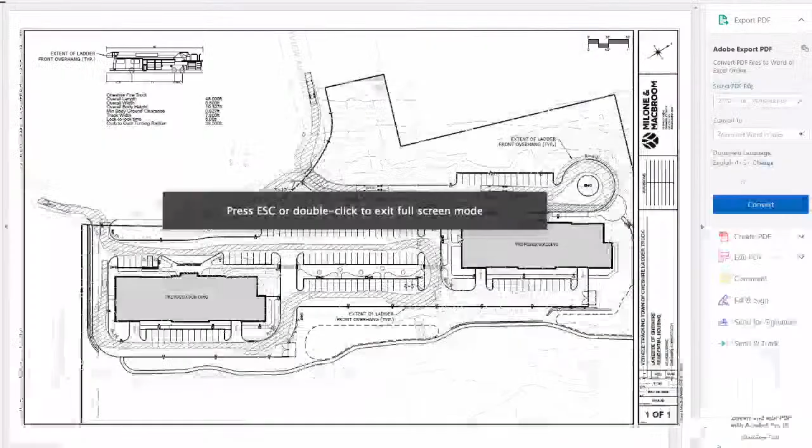Number 8, a key box system approved by the fire department will need to be installed on each building with access, keys provided for all portions of the building.

Number 9, all parking will need to be designated parking spaces with no parking allowed in the roadways internal to the development. Appropriate signage will be required. Number 10, all stair towers and the separation between the underground garage shall be rated construction.

On July 22nd, 2020, the planning office received a call regarding the numbers that were stated at the last meeting having to do with the petitions, and there are corrections. The petition to stop the zone change had 152 signatures, 33 of them were out of town, and 3 had no addresses at all. The petition to remove the Hazel Drive special permit application hearing from the agenda until there's in-person meetings had 165 signatures, with 31 of those being out of town. So those corrected numbers should be reflected in the minutes.

Additionally, the afternoon of July 24th, 2020, we received additional signatures, 23 signatures, 12 of which are out of town, in the petition to stop the zone change.

Okay, now for the comments. At 7:25 p.m. tonight, checked the dedicated public comment line, and there are no voicemail messages that were left between the last meeting and tonight at 7:20.

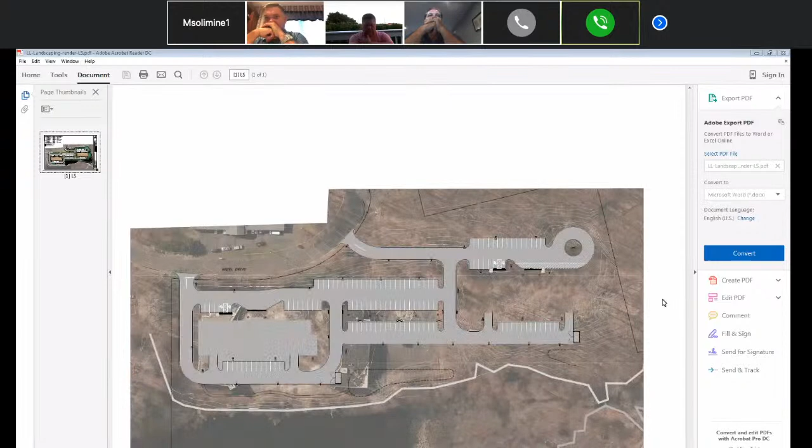My employment involves substantial daily travel with little extra time to be aware of local matters. As a result of this and other personal matters, I am late in becoming actively aware and involved in the matter at hand and regret that I have insufficient time to present more evidentiary material. Nevertheless, I offer the following.

My husband and I have been residents of 45 Lakeview Avenue since the purchase of our home on December 11th, 1980. Over the years, we have invested in improvements to our home and property, as well as maintenance and improvements to Larson Pond Dam, which were ordered by the State of Connecticut DEP Water Resources Unit. We were approached by the state within months of our home purchase after the previous owners of 50 Hazel Drive rejected responsibility for any such dam and spillway improvements. We eventually had this work performed with the required engineering studies, planning, permits, work, and inspections, all at significant personal cost. We have continued responsibilities and costs such as periodic professional inspections and assessments assigned to us on this matter.

My husband and I have enjoyed, cared for, and improved our home on Lakeview Avenue. This house was built in the early 30s, and we are only the second owners of this property. We have no plans to leave this home and the property anytime in the foreseeable future.

I want to present my opposition in, A, the July 13, 2020 meeting. Public access was made only available through virtual live streaming on YouTube due to COVID-19 restrictions. I believe it's important and more effective that this hearing be held in person to publicly discuss these issues with the Planning and Zoning Commission members. I support a delay of the July 13th scheduled hearing until such time that this meeting can be held in person, publicly attended with open participation. Further, that no vote on this should occur until after the public hearing. Other town meetings and hearings are being held as normal.

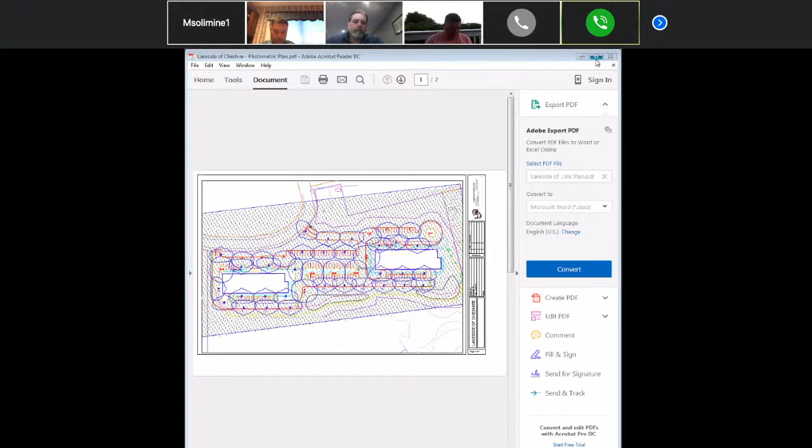It's disturbing to see such little regard for our pond and neighborhood shown not only by the company building on this site, but also by members of our own town who fail to ask critical questions about the effect such a project can have on the ecosystem. As someone raised here within the last 2 decades, I hold a point of view that not many others share. I can attest to the unsafe nature of traffic on Waterbury Road. There was some discussion about school buses during the hearing, but I think it's important to hear the expertise of residents of the area, especially children. I spent every day from kindergarten to 10th grade waiting at the end of Lakeview Avenue to catch my bus. The number of potential accidents involving children that I've witnessed are countless.

Watching cars breeze past the school bus while it was stopped with lights flashing and the stop sign fully extended was a weekly, if not daily, occurrence. I have no doubt that the woman who drove my elementary school bus all 6 years that I attended Doolittle Elementary School will confirm this fact. She spent a ridiculous amount of time blaring her horn at drivers who spent increasing amounts of time staring at their phone instead of the road. I began learning to drive when I was 16 years old, and from that point on, I no longer took the school bus. Instead, I began to brave the left turn out of Lakeview Avenue myself during morning rush hour.

I know 4 other students in the Lakeview, Andrew Larson area alone that will be driving within the next 2 years. This includes my sister, and I am terrified of the idea of her having to learn how to take a left-hand turn out of Lakeview Avenue as it is, let alone with 114 apartment units built just down the street. For someone to visit our neighborhood even multiple times during the COVID-19 pandemic does not give a true estimate of the traffic in the area, nor does it outweigh the years of experience of actual residents in the area.

I understand it's impossible to satisfy everyone all the time. I merely ask that you choose to consider the consequences this project will have on lifelong residents of your town. I ask that you make a decision with the families, children, and wildlife of the area in mind, rather than the cherry-picked statistics of business people seeking to make money at the expense of Cheshire citizens, your neighbors, friends, and the people who look to you right now to make a choice in their best interest. Respectfully, Emma Fox.

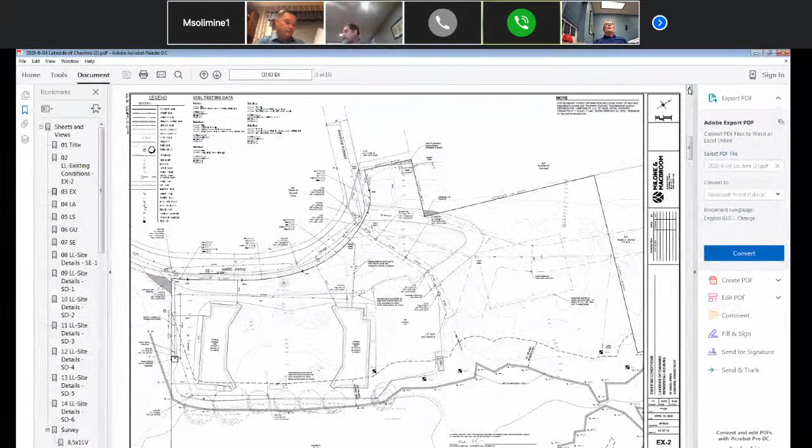The insertion of a large concrete environment seriously disturbs the current environment. In addition to the potential for creating a pandemic hotspot, the insertion will immediately create a heat sink, counteracting the cooling effect of the foliage it will displace. There is proposed landscaping, but not enough to offset the negative effects of the parking lot and building structure.

There were comments relative to children, but again, this is relative to the dangers presented by significant traffic on less than adequate roads and the requirement for children to wait for a school bus on a busy major road and the lack of suitable sidewalks. We are concerned for the safety of our children, our neighbors' children, and the children of the potential occupants of the development. There were comments about the potential impact of an increase in the children attending schools, but it appears to me that such comments were spurred by the reference to decreased school enrollment within the documents submitted by the applicant. I will note that there is a degree of skepticism regarding the current process.

However, when one considers a public statement, including that developments generate approximately 6 trips per day for a total of 900 trips, and then state that the proposed Hazel Drive development will generate a considerably less number of trips, 50, one can understand the level of concern.

Consider the IWWC committee minutes indicating that the standard calculation that generates an estimate of 23,448 gallons per day for development at 50 Hazel Drive was changed to a calculation that generated an estimate of 12,005 gallons per day. Apparently, there was a discussion between a representative of the applicant and a representative of the town, and they decided that a change should be made because the units would be smaller. Perhaps the commission, applicant, and citizens can work together to improve this application along the lines I suggest.

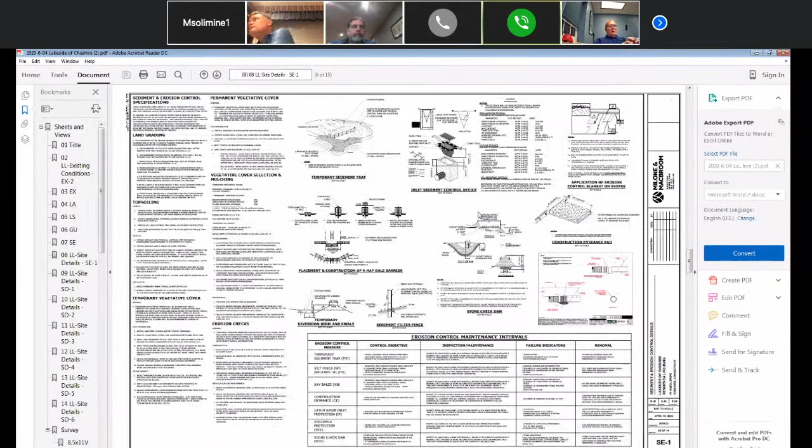Question: Why wasn't the text of the reports from the police and fire department put into the last meeting minutes? Why doesn't the applicant have to start with the state traffic and DOT level first for approval? This seems to be going backwards. When the applicant did their traffic study, were all three street traffic coming in and out calculated all together, or did they have numbers for each street individually?

The traffic study engineer said that the visibility study was taken from the emergency breakdown lane, not the stop line. When pulling out of the road, if a vehicle gets hit at which line they are, then who is at fault?

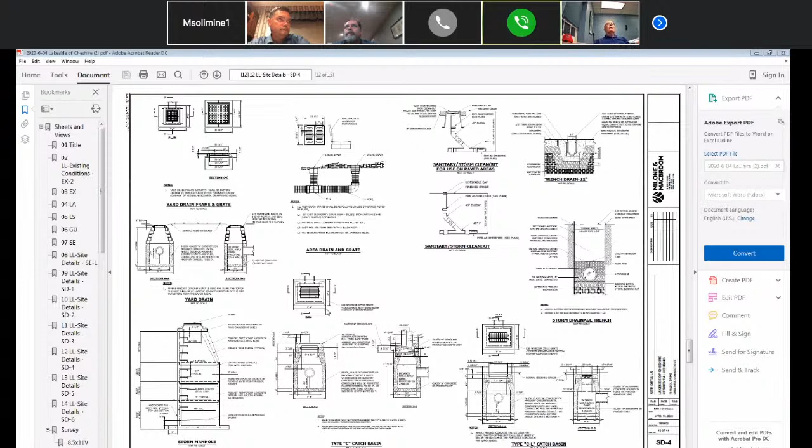Did the traffic study take into consideration that the emergency lane is used daily to continue the 2 lanes up to the light? If the law requires 228 parking spaces and there is no visitor parking included, it was passed through inland wetlands with much less. Then why is zoning even taking this application into consideration until it is sent back to inland wetlands with the mandated numbers?

If this project is passed, in the water runoff, how will it be protected? Will there be a cleaning and servicing program attached to this forever? How often will it be cleaned and serviced, or not at all?

If the residents find a significant loss in property values, will the town then lower our tax base? What on completion is the annual tax of this project? Are there tax exemptions? What is the average sized Cheshire home tax?

Do either cover 2 children per school system? Is there a plan to make a safe bus stop for those children that are now existing and the massive overload from the amount of children from the 114 units?

If we can only save 1 child. This is an agenda. Safety is a huge problem. Please think of the future. Do not let this project burden your soul. Thank you for the job that you all do. I admit I could not do it. May God bless you all. Respectfully, Stanley Emon Jr.

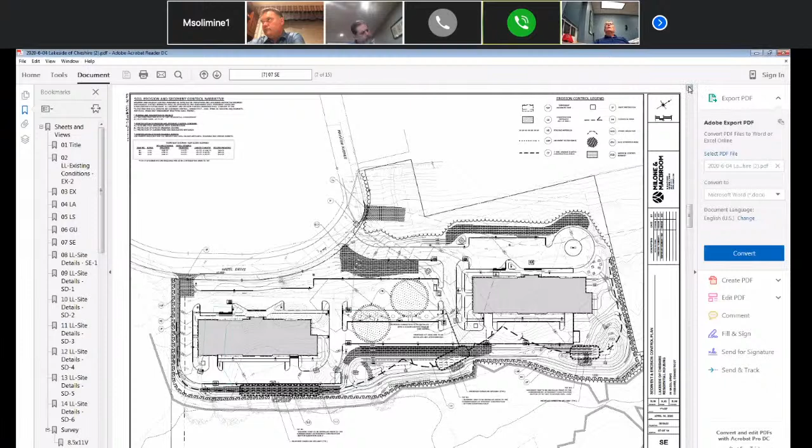Comments received today, July 27th. Dear Planning and Zoning, we would like to give you a list of reasons why the Hazel Drive building project must be stopped. This should be addressed when public meetings are open again, not shoved through during a pandemic when residents cannot attend real meetings with our voices to be heard.

Number 4, dangerous for children and all pedestrians on Hazel Drive and Route 70 Waterbury Road. 5, school and town services are limited, especially because of COVID-19 restrictions. Route 70 is dangerous for school buses already. Number 6, nature and wildlife disruptive. We have swans, herons, egrets, owls, wild turkeys, turtles, multiple varieties of birds, foxes, coyote, bobcats, deer, bears, and moose.

This area is mostly Cheshire City water property. Number 7, property value will decrease and we all lose privacy. Number 8, this is a small residential neighborhood. This huge project is out of place for this area. It's a huge project that should go on the 691 area that is already zoned multi-purpose.

Number 9, Waterbury Road is very busy and dangerous. Adding 200 plus cars will be a nightmare. They will use our streets to exit and enter, which will remove peace and safety from the current residents. Number 10, the pond is dangerous for children and was struck by lightning many times, even recently. Number 11, this will disturb our peace as the pond carries sound on both sides.

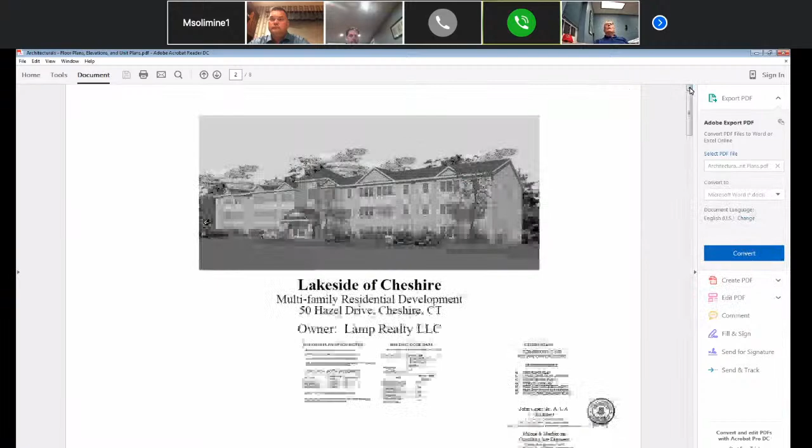I hear well-founded concern about children's safety and sidewalks. Waterbury Road will need speed bumps, but the exception of children in the building does not explain the 1.5 person occupancy in the studio apartments. As a former single parent, promoting single parent households is an irrational choice.

Proposing overpriced, undersized apartment living offering little more than inconvenient access to Interstate 84 exit 26 is also an irrational choice. The residents not killed by COVID-19 and traffic accidents will still have to get past the bears. Anyone with marketable skills will be looking for more, for their housing dollars to go elsewhere.

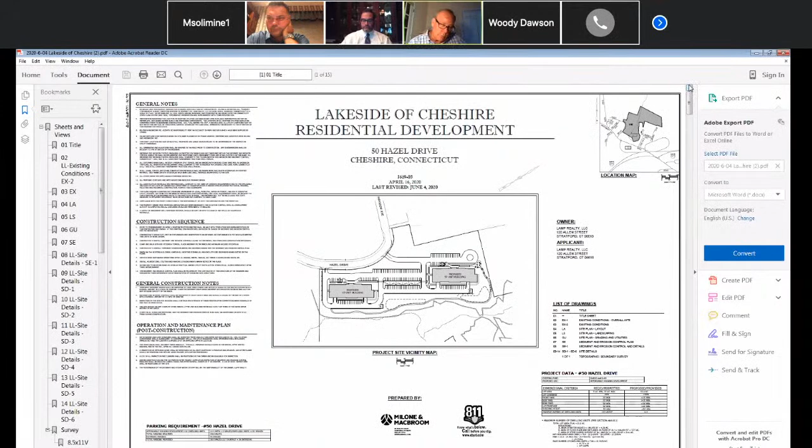And they're looking at a vehicle coming, assuming we're looking to the left, coming westbound, and that driver is X amount of feet away depending on the speed, with their height of eye sitting in the car at 3.5 feet. That's the mechanics of how we measure it and determine what's available and what is safe.

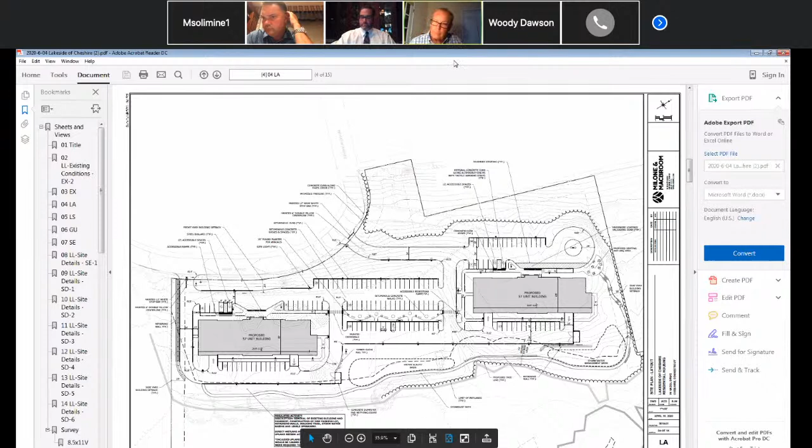There's one more issue I'll quickly touch on, though my colleague Ryan will talk more specifically about it: pedestrian accommodations. There is a sidewalk there on the west side of the road. Ryan and I talked a number of times and collaborated to get a nice connection, so there's a connection from the site to the roadway with a crosswalk system that gets you safely across the street to the sidewalk system, which would get you to Waterbury Road.

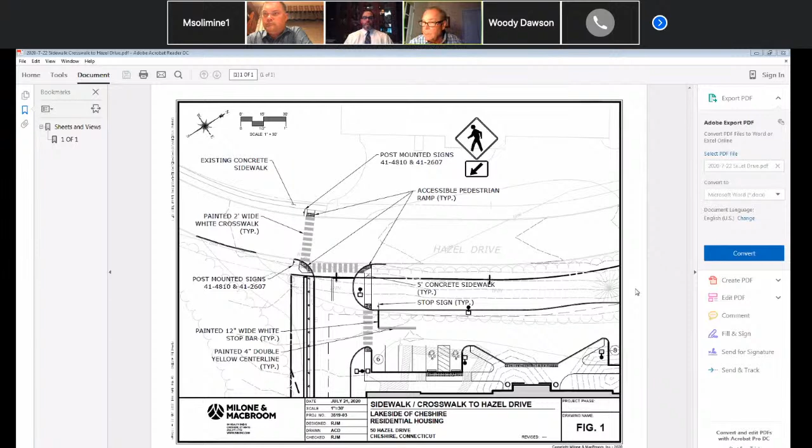So that's my summary, and I'd be happy to drill down on anything the commission would like, but I tried to keep it without being too repetitive. So thank you.

I do have one question. You mentioned you can bring some of the issues to DOT when you go to speak with them. I tend to agree with the sidewalk on the west side of Hazel Drive where it ends and doesn't get close to Waterbury Road. Is that something we can make sure you bring up with DOT? Maybe they bring it up anyway, but that's something I'd like to see DOT look at in detail, specifically making the sidewalk extend out to Waterbury Road.

I don't know how school buses work either, the number of school kids in the area, it might get school buses down that road. I don't know how that works, but if not, just looking at where the sidewalk stops, I believe someone said it was about 170, 190 feet where there is no sidewalk going into Waterbury Road.

Again, there is sidewalk on the west side. It's really about maybe 15 feet short of getting out to, I'll call it, Waterbury Road proper, but it does go all the way out there. It's not hundreds of feet away. It's difficult to see because a lot of it is covered with brush and debris, so that needs to be daylighted. But to answer your question, we could certainly address it with DOT.

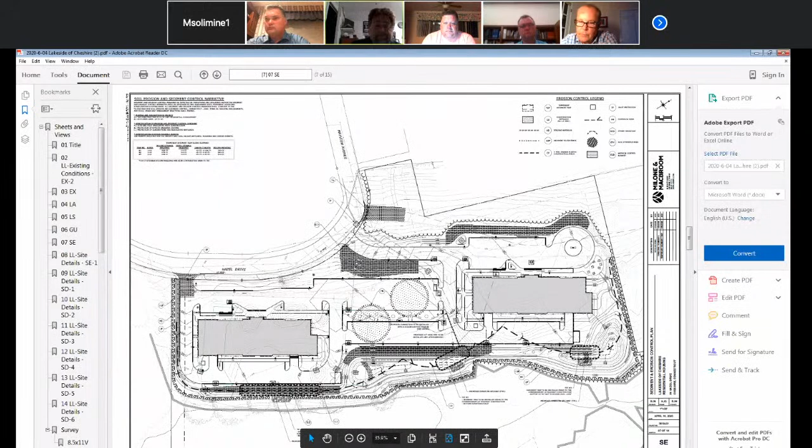If I could just make one more point, and Ryan did touch on it, but if you believe our statistics, which I tend to because they're ours, there'll be some 40 extra spaces there. So it's not like we're coming up with our estimate based on these three sources and saying we expect the demand to be 180 and we're doing 183. We're expecting the demand to be somewhere below 150, probably between 140 and 150. So we're going to have, in our opinion, a reserve of probably 30 to 40 parking spaces at the 183 number.

Have I ever been wrong in 30 years? Absolutely. So if I am, Ryan has identified where that additional parking would go.

Well, like I said, I can't get past the additional parking because a lot of people are staying home and family members are joining them and all that stuff. I really think the additional parking is a necessity from the beginning. And that's my opinion.

Respectfully, if I could just jump in, with regard to the parking spaces, I just want to be clear here that I'm looking at numbers on the parking demand and their statistics. We have three different organizations giving us statistics about the parking. ITE is saying 149 parking spaces is statistically what they estimate. ULI is saying statistically they estimate 130 spaces based on what this is. And MMI, which is the regional analysis you put together, is estimating 143 spaces here. The reason I'm asking, I just want to make sure those are correct, because I'm hearing a lot of anecdote and I'm seeing data, and those two aren't adding up. At least in my opinion, I'm going to go with the data over the anecdote.

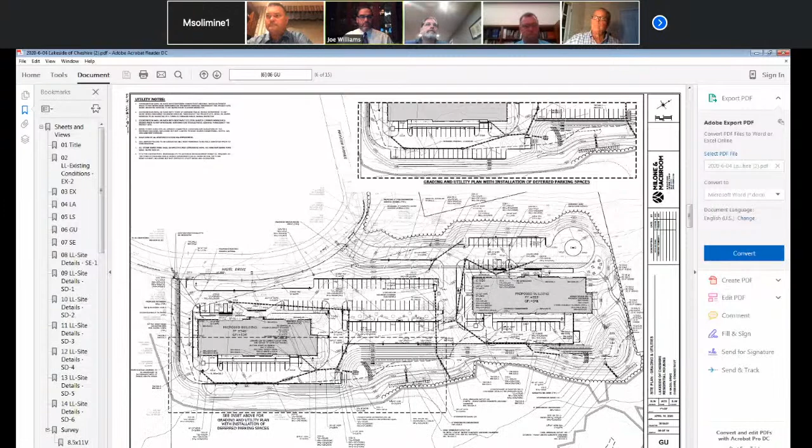Is he on the call now? He's muted, but yes, he's on. You're on mute, John. There you go. No, I'm unmuted. Okay.

One question raised by the commission had to do with the area of the roof. When you pitch a roof at 4 and 12, there is a marginal increase in the actual flat area. We were originally starting around 15,200 square feet. When I calculated the total roof area of each of the two buildings, it comes to 16,170 square feet. That would be the answer to that question.

While I'm here, I'd be happy to entertain any other questions regarding the architecture of the building. What's the full height of the building from the lowest level on the back side of the buildings? The drawings here don't have that dimension on them.

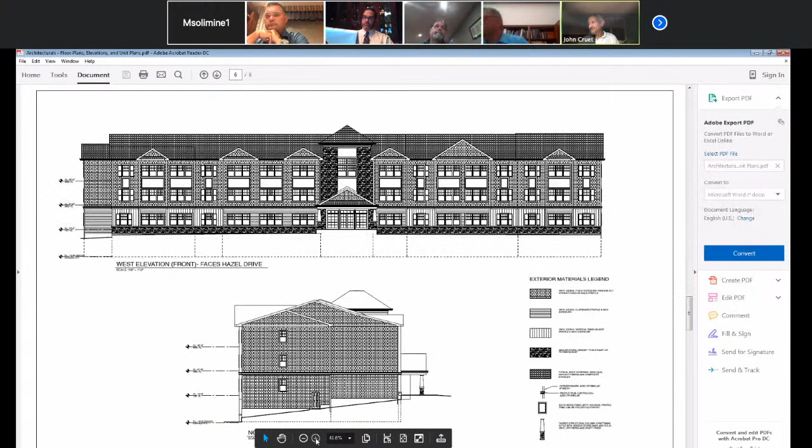Let me open this attachment on the email and see. I issued a drawing, let me just blow this up if I can. It has some dimensions. Bear with me a second.

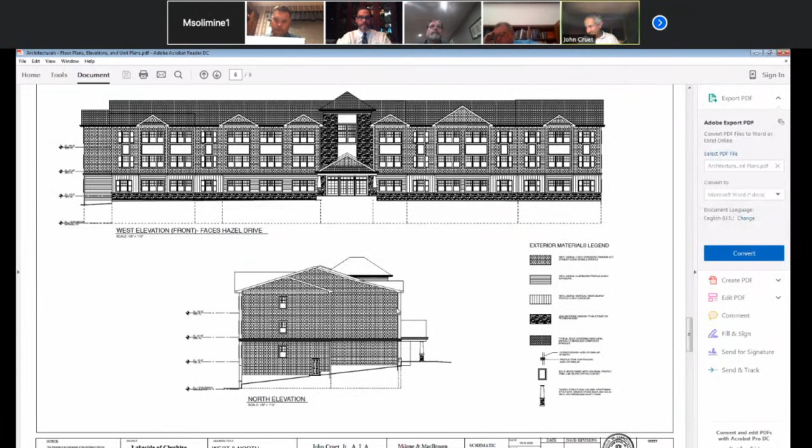The height at the 3-story part to the peak of the highest portion of the roof is about 48 feet. In the back, from the ground to the peak of the roof is 56 feet. These drawings I had issued to Ryan McAvoy in an attempt to further clarify and help him answer his questions regarding the building height that were raised to him.

I believe there's a 50-foot height restriction. Is that from the lowest point? Is that from the highest point? Where this would, to me, would seem to fall out of that.

If I may take that on, Commissioner Brigado. The building height is measured as an average between the peak of the roof and the average grade around the building. For our southerly building, essentially the same calculation applies for both structures. The average grade is about 540 around the southerly of the two, and the peak of the roof longitudinally north to south is 588. That represents a building height of 48 feet.

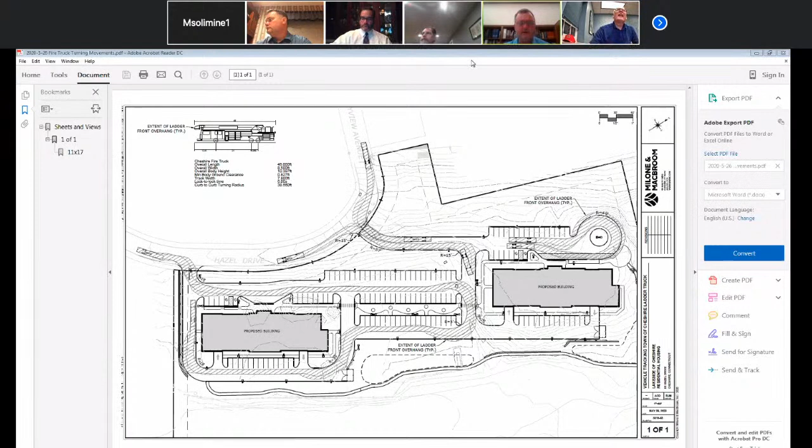There was some discussion from the neighbors and, my understanding, from some commission members regarding clearing vegetation and wildlife. I touched on this at the last meeting, but I want to make clear that with this proposal we consider this to be a redevelopment of an existing disturbed property. There are obviously significant buildings and parking there presently. Large portions of this site were cleared, graded, and modified historically for septic systems and access across the wetlands. What we are seeking to do is utilize essentially the area that's been developed and modified historically for the purposes of this development.

We had one of our wetland and environmental experts, Matt Sanford, review the species and nature of the property being disturbed. It comprises mostly invasive species that provide very little in the way of habitat for any wildlife of special concern, threatened or endangered species. Primarily, it provides habitat for common mammals in urbanized developments.

So there is very little in the way of clearing of natural vegetation on this site. There are some areas that have reforested over the past few decades, namely on the slope near the northerly of the two buildings, installed originally to construct the septic field. So there are some wooded areas, perhaps several decades old, that we're going to be clearing, amounting to less than an acre of land. In terms of clearing of wooded vegetated areas, it's much more consistent with what you might see with a couple single family homes in an R20 zone.

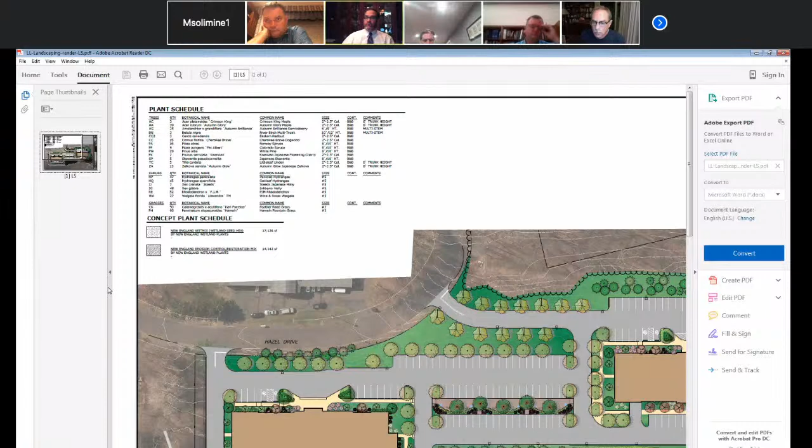If the commission wanted us to add a few evergreen species between the south building and the pond area, or maybe substitute or intermix, whatever would make sense if a landscape architect looked at it, but to include more evergreen species, I believe my client would be open to that idea.

Okay, well, that sounds reasonable. I had a related question. These trees, I'm not sure if this was brought up, but these trees you plan on, they will grow quite large, correct? Yes. So that will mitigate the impact of the multi-story building.

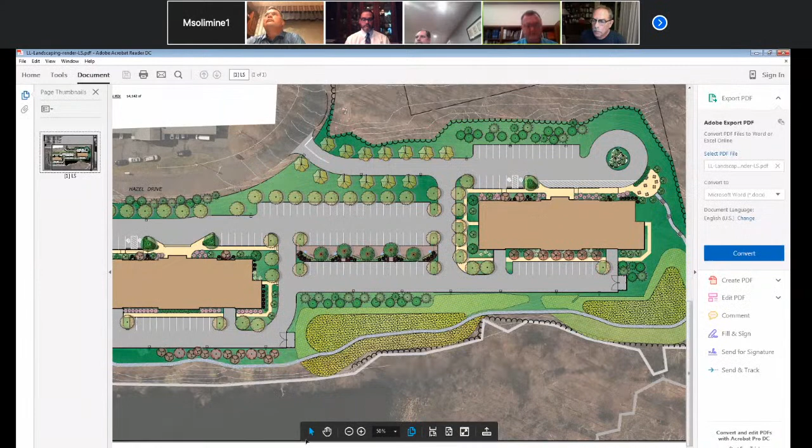Yes, it will cover the first couple of floors at least. So we estimate that the flowering dogwoods and the eastern redbuds, below the parking, on the side of the parking, grow anywhere from 20 to 30 feet in height, and the maples along the landscaped islands closer to the building itself, under ideal conditions, can grow to 40 or 50 feet. Yeah, okay, well, that's good. Thank you very much.

Welcome. I do have a couple other things, Mr. Chairman, if I could just run through them real quick. I know it's getting late, but I just want... Sure, go ahead.

We did submit a lighting plan, a photometric plan showing the impact or effectiveness of our lighting plan as it relates to providing appropriate illumination on parking and driveway areas. And that's part of your record. The plan you have represents a condition where 100% of the illumination capacity of the fixtures is in effect.

Although our client, Lamp Realty, has chosen a light fixture that has motion sensing capabilities, providing the opportunity to dim lights when they're not needed, when there's no pedestrians or vehicular traffic. That could reduce the glare in parking areas by, Tony may correct me, as much as 40%. And if motion is detected, they will gradually raise up to the illumination level shown on our plan. So that would provide benefits to the amount of light emanating from the site, and also his electrical cost.

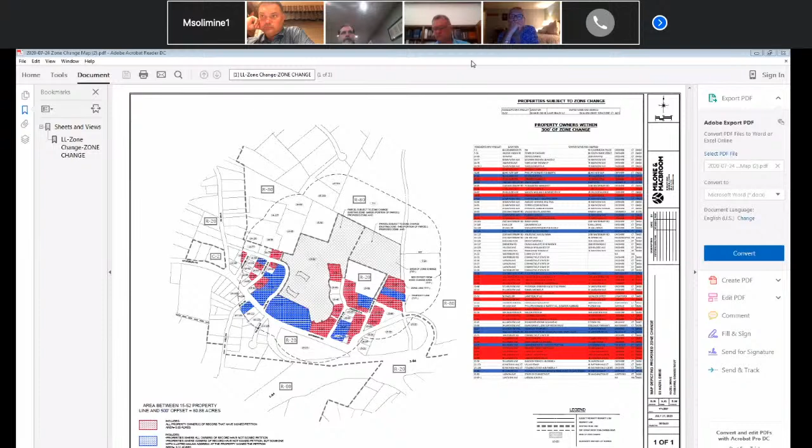Okay, any other? Yes, Mr. Tedesco. Very quickly, I think that anything the applicant can do, assuming this is approved, to create more separation through either vegetation, trees, or a fence between the parking lot and the pond, I think you'd be making the neighbors happy by doing that. And you indicated you would be willing to take a look at that. I think that's something that could be important, again assuming there's an approval.

And just a question I have. I've driven down Hazel Drive a number of times. Right now you really can't see the property from Hazel Drive because of trees that have grown up over the last 20 years or so. I'm curious as to whether the apartment buildings will be visible from Hazel Drive once the project's finished.

Yes, Commissioner Tedesco, they will be visible when the project's finished. We do have quite a bit of landscaping proposed between the building and Hazel Drive, but I would certainly feel comfortable saying that the buildings will be visible post-construction. Over time the vegetation will grow and maybe reduce the visibility, but right now what you see along Hazel Drive are some trees that appear to have been there quite a long time, and then quite a bit of invasive growth that limits any real view of the buildings from Hazel Drive.

Yeah, I think to the extent that you could eliminate visibility, although the building to me looks like it'll be a nice looking building, but people have said that it's out of character with the neighborhood. It's a big apartment building in a neighborhood with very nice, actually smaller homes. To the extent that you could hide the buildings, which may not be possible, that might be something that would be preferred by the neighbors. And I think that's all I have to say. Thank you.

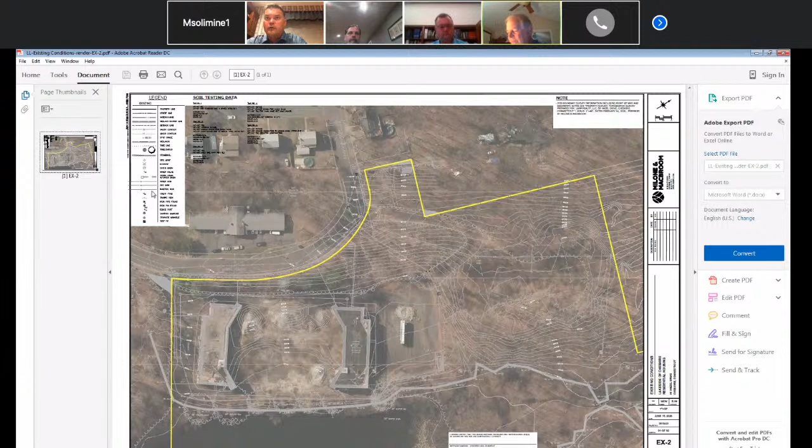Okay, anyone else with questions? Any other commission member? One more question. Sure, Mr. Natali. Ryan, when the company that did the lighting plan, did they talk at all about... I know that you're going to have everything downward facing, with timers or shutoffs. I forget what exactly you said, but did they talk at all about the light pollution generated by this? Because again, you're going to be in the middle of the neighborhood, and looking at page 2 of that lighting plan, it looks like an airport at night. I know it's probably not intended to look that way, but did they talk about that at all?

Well, the lighting plan will be fully regulations required, first of all. Second of all, the pole heights are only going to be 12 feet maximum, which is the maximum allowed for residential developments. They will have full cutoff features so that all the light is directed downward. There will be no light spilling off the property, no light pollution directed up. I believe our client is having a plan that's dark skies compliant.

I would just go back to the discussion that we're providing the illumination required by the regulations with fixtures and pole heights that meet your regulation requirements. Gotcha, thanks. I just wanted to get that out there because I think it's important for folks watching to realize that you are taking those steps, especially about the dark skies.

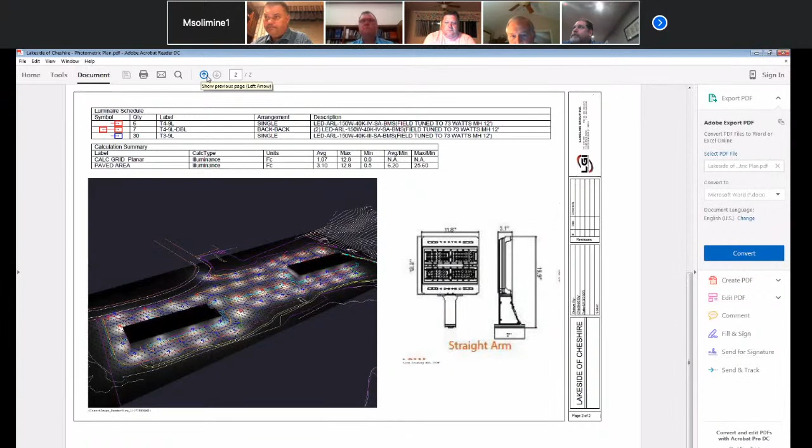Okay, any other commission members? I had one comment, Chairman, if I could. Sure, Mr. Tedesco kind of hit on it briefly as far as the trail goes along the pond. I know Ryan had mentioned that there's basically a 4-foot drop and it's not accessible, but any railing or fencing or any kind of safety devices that would be put on there would certainly be ideal and appreciated, just for children's safety, adults, dogs, pets, whatever.

So yeah, we can certainly look into that. I think when I say that there's a 4-foot drop, it's not exactly a 4-foot precipice. It's a 4-foot vertical change from along the edge of the pond itself that perhaps, and I wasn't trying to suggest that there be no access to the pond itself, but that it really is not inviting. It's not exactly a flat, unvegetated path to approach right up to the edge of the pond. It is somewhat of enough of a grade change that it may not be as inviting, but we could certainly look at safety railing, particularly in areas where it is a little steeper.

Great, thank you. Will that path have any kind of pathway lighting? I don't believe we're seeking pathway lighting there. It's just really a passive stone dust path along the stormwater basins, along the edge of the wetlands. We're trying to keep it as low key as possible.

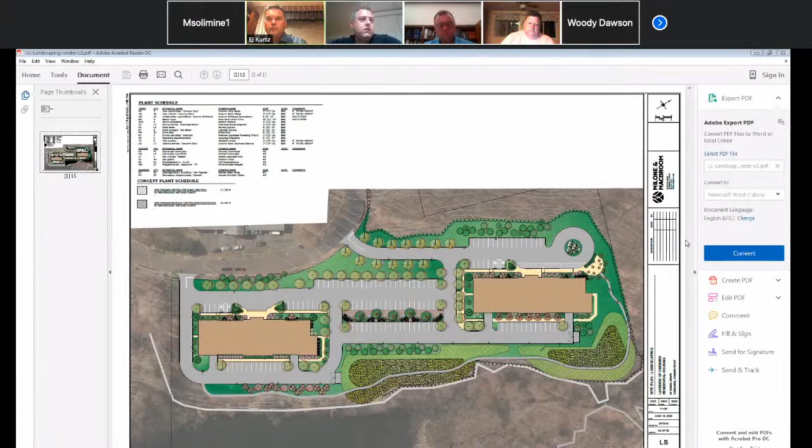Okay, any other commission members with questions? Okay, Mr. Williams, would you like to do your wrap up that you were looking to do? Yes, thank you. And I want to say thank you to all the commission members and staff on behalf of my client and our team for your diligence and professionalism, and especially for the time that the members of the commission volunteered. We think you all have done your jobs and conducted the town's business in the best way possible during a difficult situation, so we appreciate it.

And we've given you lots of information. I believe we've responded to all the questions and requests that have come to us, so I'm not going to go back through all of it, but what I would like to ask the commission to do is just walk with me through the main facts that have been presented to you and look at the application through the decision-making rubric that you all have put into place in your regulation. The standard for approving both our zone change application and our special permit application is essentially the same as set forth in the Affordable Housing District Regulation: the commission shall approve the application unless it finds that denial is required to protect substantial public interests in health, safety, or other matters which the commission may legally consider, that such public interests clearly outweigh the need for affordable housing, and that those public interests cannot be protected by reasonable changes to the petition.